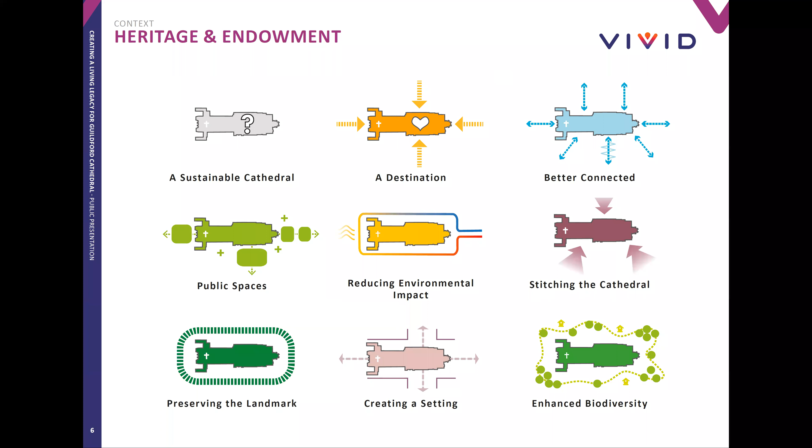So the new community then seeks to enhance the cathedral in a number of ways, helping to attract more visitors, to make the cathedral more sustainable, enhancing the physical setting, improving connections, creating new spaces for different activities, addressing environmental considerations, stitching the cathedral into its surroundings, improving the landscape that currently exists, and also the biodiversity as well, and finally respecting the historical significance of the building itself.

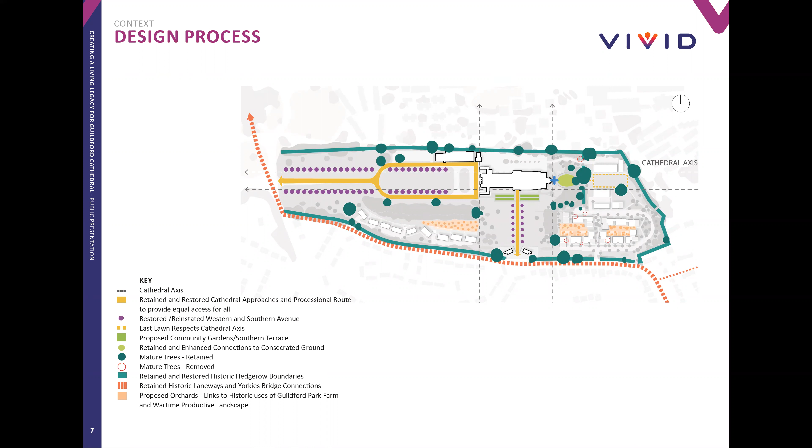In terms of the design process, it's really important we understand how the cathedral works, how it was designed, and how the architect's original vision has helped identify 3 key character areas for new housing, and importantly ensure that the cathedral's legacy is enhanced and secured for the future. Respecting the key approaches towards the cathedral, the viewing corridors and the axes, both north-south and east-west, has helped define these development plots.

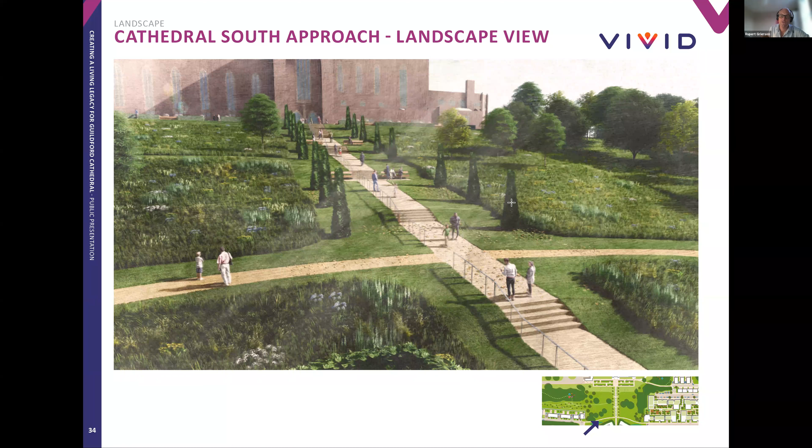One of the first moves is to look at improving that southern processional route up to the cathedral. That will involve repairing and restoring the path network and the steps, replacing the low handrail with a new handrail, sensitive integration of lighting, pedestrian connections east and west, introducing pause points on those steps because it's obviously a big flight, enriching the grassland in terms of species-rich meadows, and then bringing back a series of yew trees, echoing Maufe's original vision.

Thanks, Sophie. When you get to the top of those processional steps, there will be a new cathedral garden, framed by evergreen native hedging, delivering a rich palette of planting for the community to enjoy, as well as smaller retreat spaces in that amazing south-facing aspect with views out to the south. Individuals can come and use that space in a more reflective way, on that new movement corridor. Thank you, Sophie.

An integral part of the landscape strategy seeks to enhance the biodiversity value. As already mentioned, some initiatives include enriching the grassland so it becomes species-rich grassland. There'll be positive management of some existing trees and hedgerows, as well as introduction of a richer matrix of biodiversity roofs, providing habitat for invertebrates, as well as bird and bat boxes through those trees. All of that would come under a landscape management plan that's part of a joined-up strategy for the site. Thank you, Sophie.

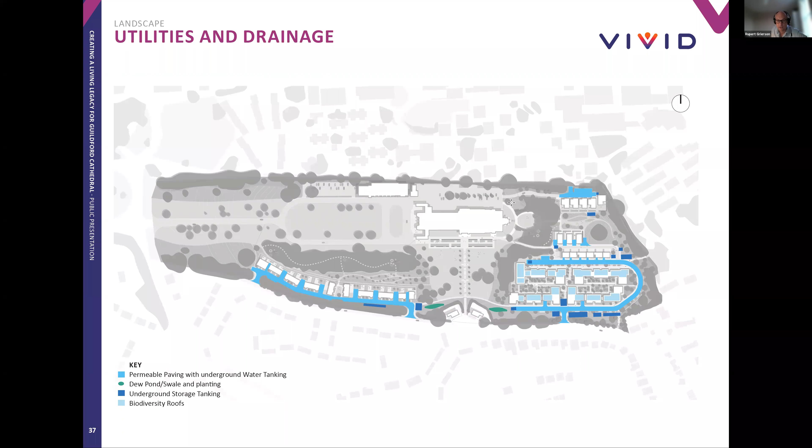I think the key thing here has been working with those and around those existing trees.

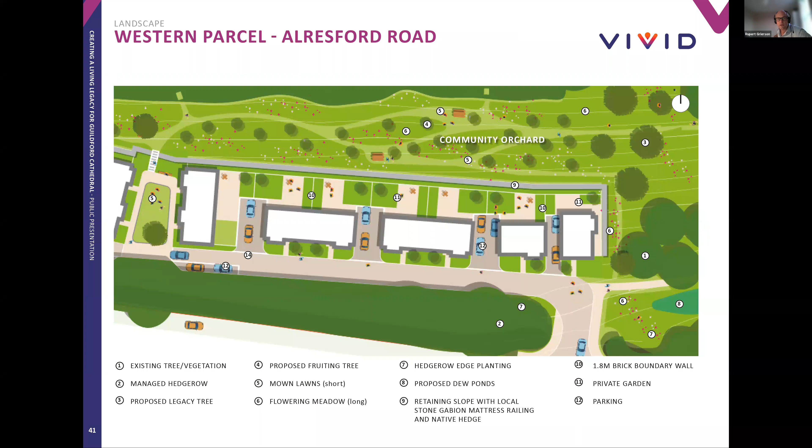The western parcel, Alresford Road, just to relocate you there. Some of the key elements here is we're looking at a connection through to the north that takes you through to a new community orchard, and then takes you on to the next slide.

We'll give you a feel for the nature of that connection, where you get these glimpsed views up to the cathedral, and then if you move up those steps, you come into where we're looking at local heritage fruit trees, a combination of apples, pears, within that space between the existing woodland and the new housing.

Thanks, Rupert. So in summary, it's probably quite helpful and useful to draw a number of comparables really between the previously refused scheme and this revised proposal.

So the site is obviously now allocated. It's for a lower density scheme with a reduction in dwellings, in habitable rooms, and an overall accommodation area. The site area itself has increased, allowing us to provide more landscaping. And of course, really importantly for us, for the cathedral, for the community, the affordable housing offer has increased to 40%, with a policy compliant bias towards much needed affordable rented homes.

One question I have received, Sarah, this might be one for you. It's regarding local schools being oversubscribed. Somebody has asked what additional schools provision is being provided so as not to overburden the system. Sarah, I wonder if you could talk us through the planning requirements here and whether there's a need for a school.

Yeah, thanks Lisa, I can kick that off. Given the size of the proposals, we won't be developing a new school on the site. However, we will be in discussions with Guildford Borough Council following submission of the application regarding contributions and local requirements for schools, which will be discussed and agreed with the council and then secured through a Section 106 agreement in due course. So that's something we're expecting further discussions on following submission, but we're not delivering a school on this site given the scale of it.

Thanks Sarah, perhaps this is another one for you. Someone has questioned the timeline for the project, and mentioned the submission of the application next week. Is that an appropriate timeline given we're consulting this week?

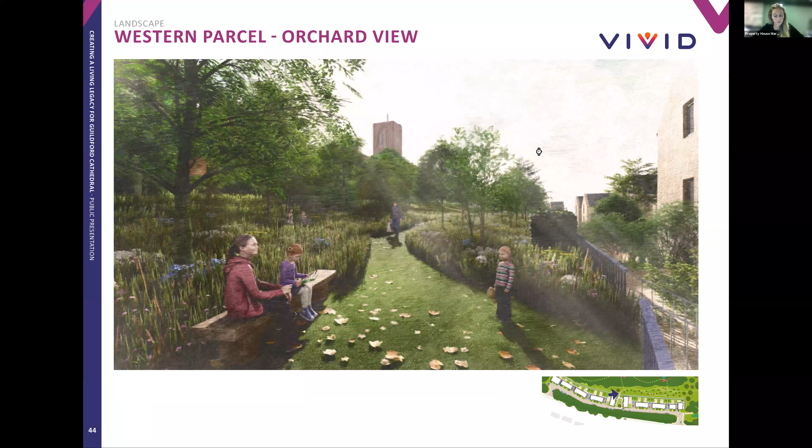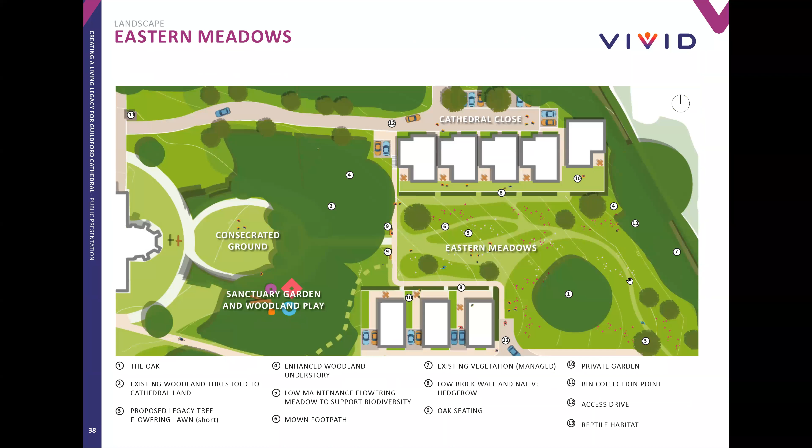Thank you. Okay, great. Are we able to have a bit of a recap? Perhaps we can pull the slide back up. Somebody has asked whether we can be talked through the dwellings closest to Scholars Walk. Yes, we can get that up now. Thanks, Sophie, great. Perhaps this one could be useful, or we could show the site mix as well. Perhaps you could just talk us through the thinking there again in that area.

Yeah, so what we've tried to do is maintain a real generous distance between the boundary and that southeastern corner. We've engaged with a number of the residents of Scholars Walk previously on the earlier Linden Homes planning application, and know the sensitivities there. So we've tried to maintain the existing landscape and treescape buffer along the boundary, and allow plenty of room for additional landscape in that location too. We've also introduced some SuDS and swales there to capture some of the surface water runoff. We've then got the footpath, as you can see, and another landscape verge.

We've got the shared surface treatment, which allows for very slow car speeds as they're moving up the slope. And then we've got an apartment building beyond that, a 3-story building set within the slope with a flat roof on that closest element.

What we try to do along this entire southern edge is really set the buildings back quite some distance from the boundary. You've got the existing homes to the south with front gardens and driveways, then the road, the existing hedgerow and trees, a generous landscape buffer, a shared surface, some defensible space, and then the buildings themselves. So quite a substantial distance.

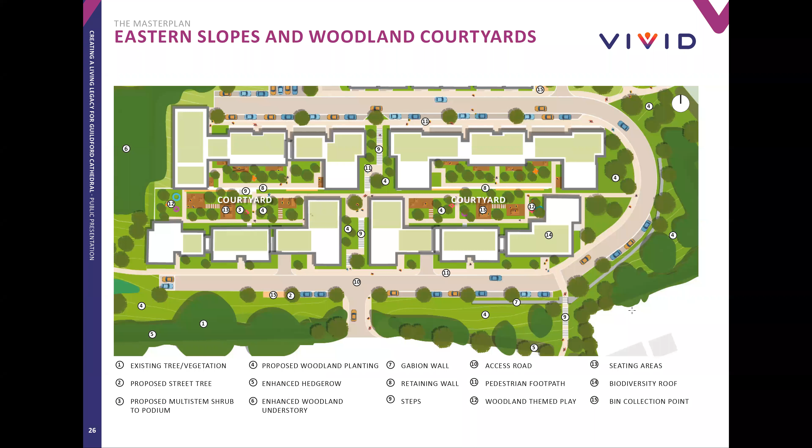How will the estate be managed on completion? Will that fall with Vivid or the Cathedral?

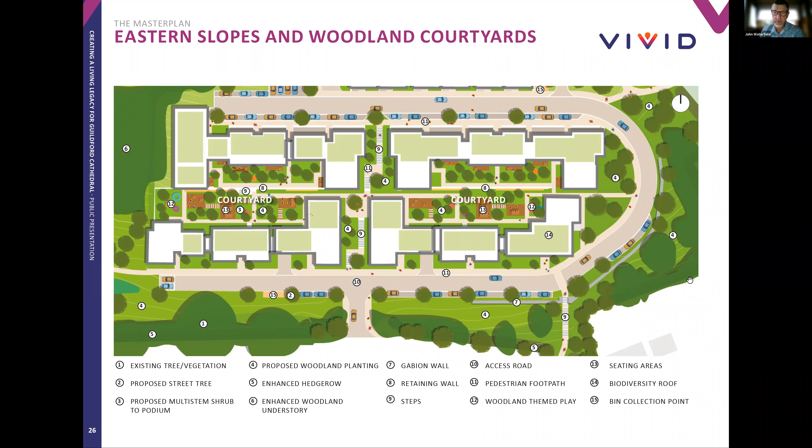Yes, we won't be creating a management company or anything like that. We will be maintaining the estate using our own direct labour and working to a management plan, and we'll manage our land and the Cathedral will manage theirs.

Somebody has asked if there is a chance of there being a model available to give the public a better idea of how the whole development will work. I understand VU.CITY technology provides sort of a modelling method of doing that. Is that right?

It does, yeah, absolutely. VU.CITY allows views from any distance, any location, and any elevation. So you can be at ground level, eye level, or indeed raised above that. It's a very intuitive, interactive and helpful device, but we'll certainly take the thought away and give consideration to a physical model.

I'm conscious of time. A lot of people are asking about viewpoints. As we've said before, we've got some of those coming at the moment that the team are working on that will be included in the application, so there will be a chance for people to have a look at those.